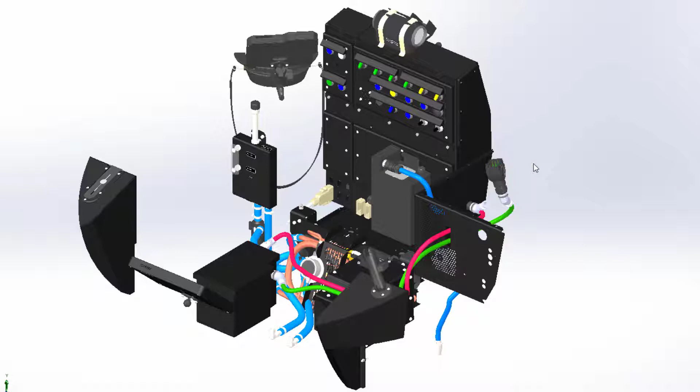When you go deeper into the beautiful unknown of the underwater world and rely on your power, oxygen, and navigation, electrical design plays a big role. In SOLIDWORKS, we bring multidiscipline engineering into one ecosystem.

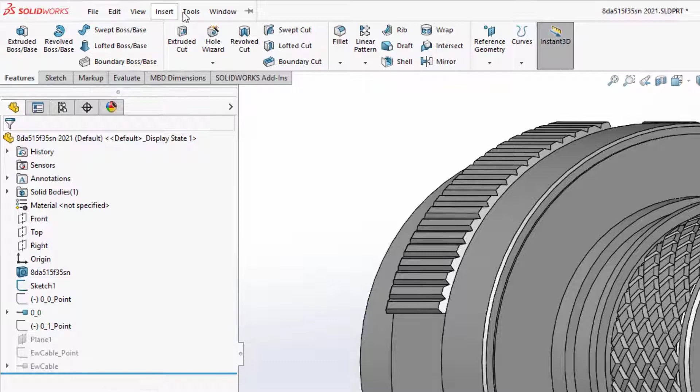Creating electrical information for a SOLIDWORKS part does not need to be a long, drawn-out process. Adding connection points in SOLIDWORKS became easier. They can be done inside SOLIDWORKS by going to Tools, SOLIDWORKS Electrical, where you can select Create C-Point with Manufacturer Part. In this dialog, it remembers the last manufacturer part that was used, or you can browse and select a different manufacturer part from an extensive library.

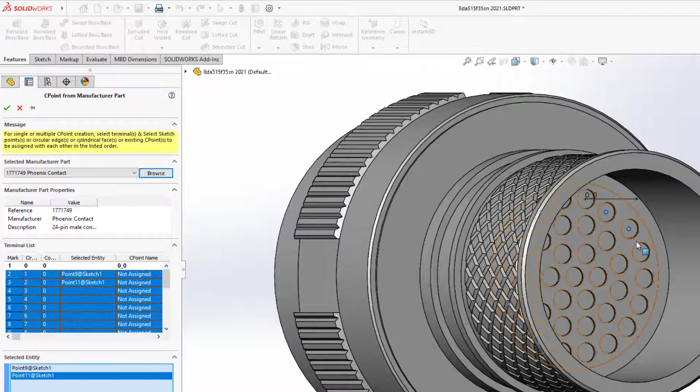The terminal list shows the list of connection points that need to be added. Selecting a point or an edge in SOLIDWORKS updates the table, and selecting OK will add these terminals to the part.

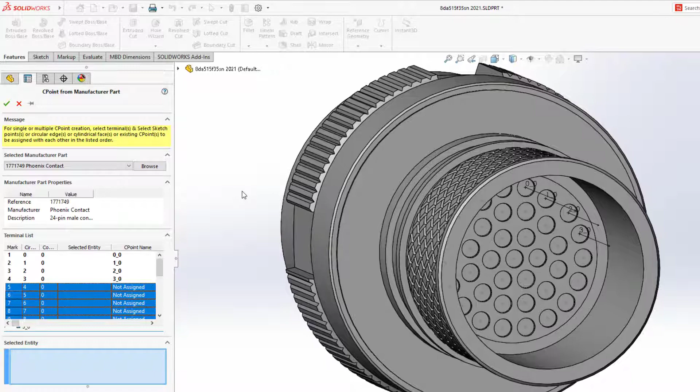Going back to Tools, SOLIDWORKS Electrical, Create C-Point with Manufacturer Part reveals what terminals already have been placed with the remaining list to do. The ability to select the point or an edge in SOLIDWORKS, to add the connection point with table updates, allows you to quickly create electrical components right in SOLIDWORKS. Less time creating parts and more time designing.

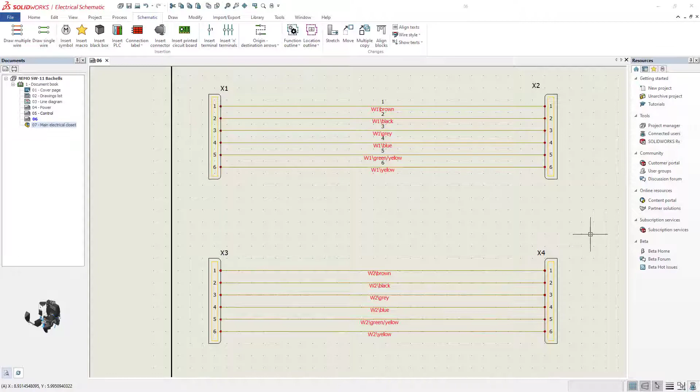How would you protect the junction between contacts and wires to eliminate electrical failures? Backshells are used, and SOLIDWORKS now supports them. Two harnesses from the battery to the control panel and external plug are created in SOLIDWORKS Electrical Schematic. In SOLIDWORKS, these two harnesses are routed.

Now that the routes are in place, you can address the wires and contact protection. Adding backshells to the connectors removes the stress between contacts and wires. Backshells are available in Design Library, Routing, Electrical, Inline Components. A 45-degree spin coupling was used and mated to the connectors.

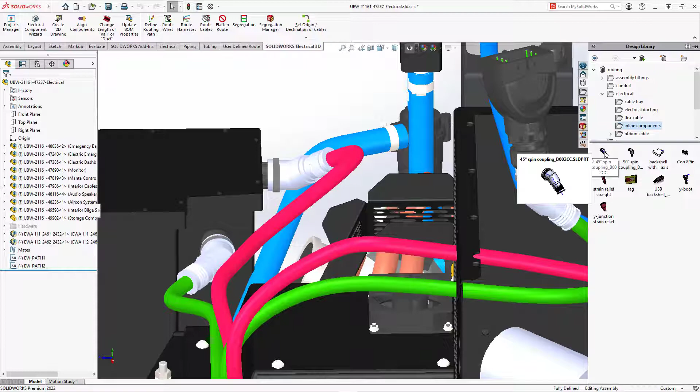One more connector with a backshell will need an adjustment of the harness to go through the backshell. Edit the harness that is in red and select the body of the backshell. From the right mouse button, choose Align Components. Select the spline of the harness and then the axis of the backshell.

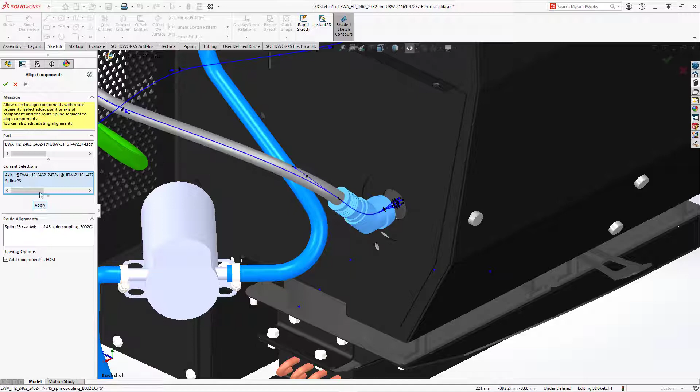Efficient use of backshells during design will protect the junction between contacts and wires, eliminating downstream manufacturing delays and costly redesigns. Creating harness drawings and tables manually takes time and can be error-prone. Flatten Route in SOLIDWORKS automates this process and now supports backshells. Flattening this red harness will include backshells along with the harness and connectors in its 2D position, and will show them in appropriate locations.

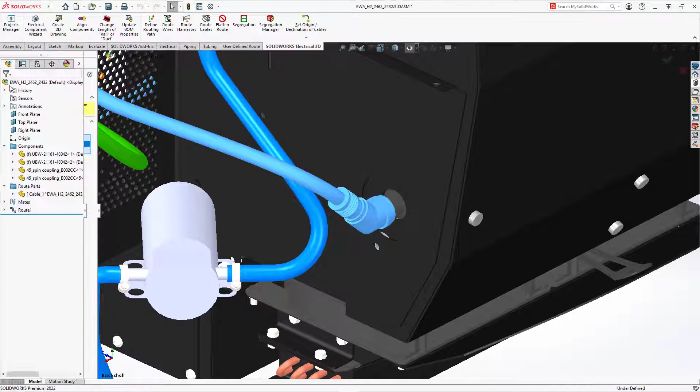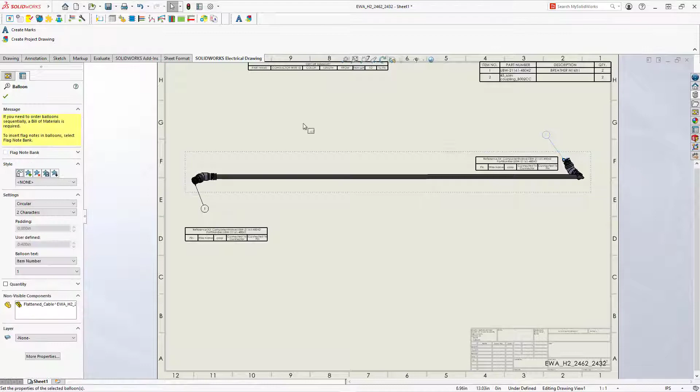In the Flatten Route dialog, choose what detail of documentation you will need to include, like manufacturer, display 3D connectors, and checkmark for drawing options. Choosing OK does produce the harness drawing with connectors, backshells, tables, and callouts automatically, and saves time for engineers to tackle other technical challenges.

The SOLIDWORKS ecosystem lets you quickly create electrical information for components, add and manipulate backshells for contact and wire protection, and create flattened harness drawings that include backshells.